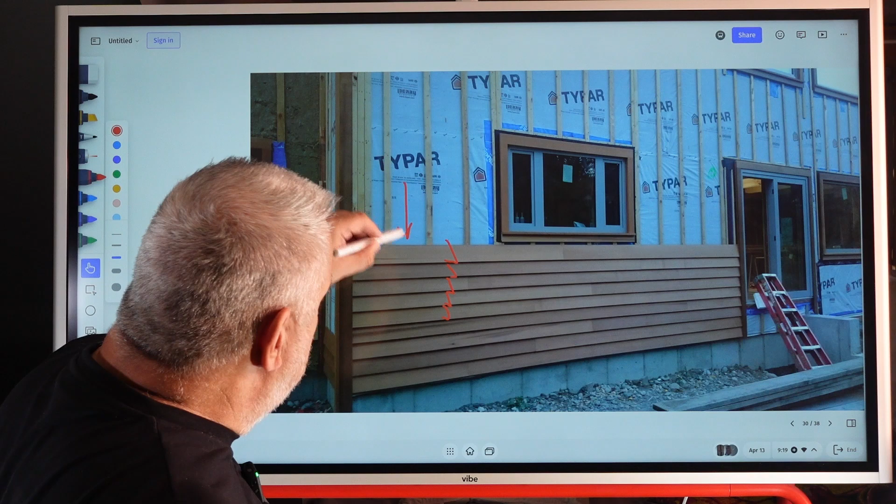There is a drainage space, there is a ventilation space, and that can drain out the bottom and it can ventilate up through there. But pretty much wherever I have the siding, this is a closed system, right? Meaning I don't get any lateral air movement across that system. It's all vertical and it's happening behind, which provides me with a very good amount of drying potential.

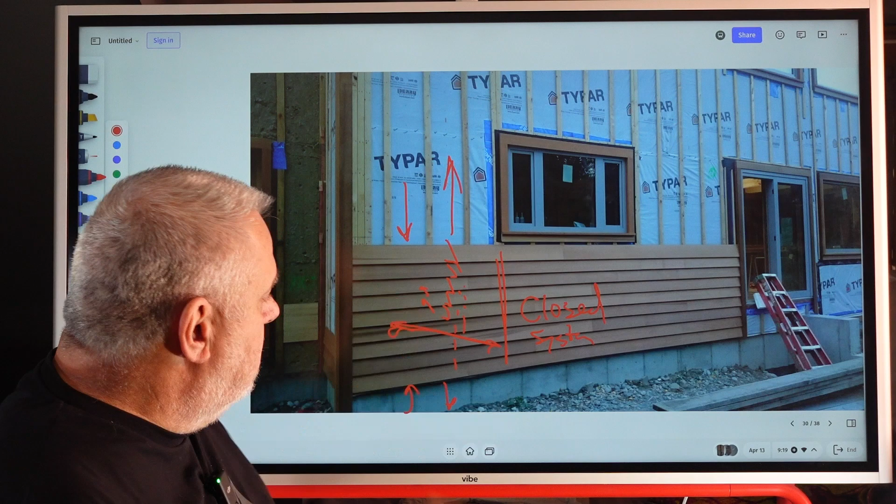It arguably lessens the wetting potential because everything is dripping here in a shingle fashion from the lap siding, right? They're properly lapped. But believe it or not, moisture and water does find its way up into those joints. Not a lot, but when the wind blows, pressure differences. Remember, what are the three things I need for a leak? I need water, I need a hole, and I need a pressure difference. And if I have those three things, then I have the potential for a leak.

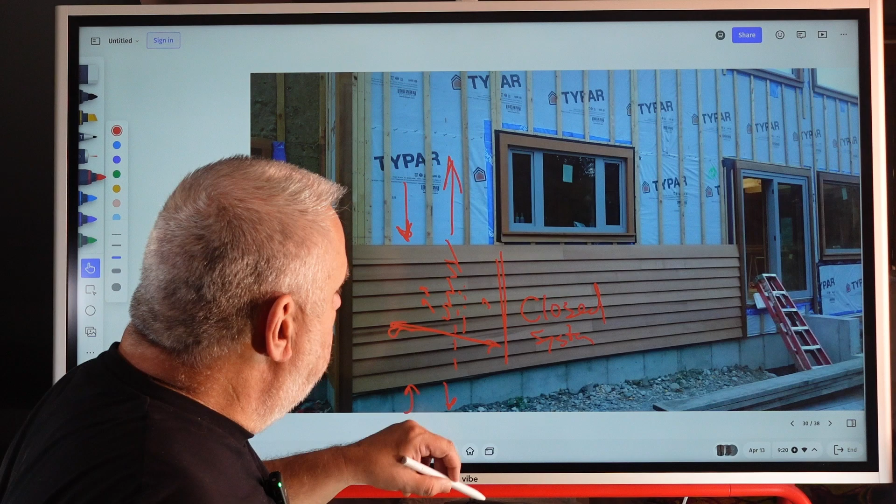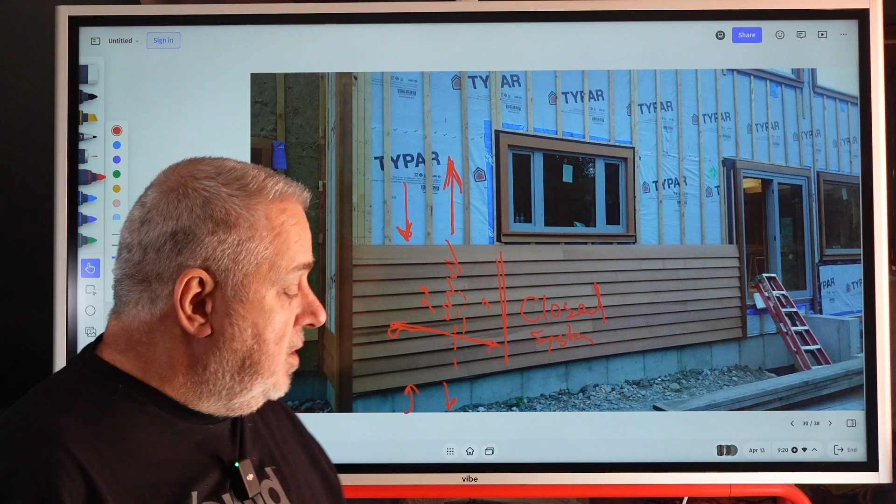So, by having that space behind, should I push water in, it has the ability to drain, and if it's a little bit of water, then maybe I am simply just drying out that system there, right? So that's a closed system. Let's take a look at an open system.

But the difference between the previous system and this one that we'll call an open system, right? The fact that it's open means that not only do I have draining behind and drying behind, I also have lateral drying, right? Basically, its system is wide open to let air in.

Now, I know what you're thinking. You're probably sitting there saying, well, Steve, aren't you letting a whole lot of water in? Yeah, I'm probably letting a little water in. You'd be surprised at how little water did get in there. But if it does, why do I care? I've maximized my drying potential on this wall system, right?

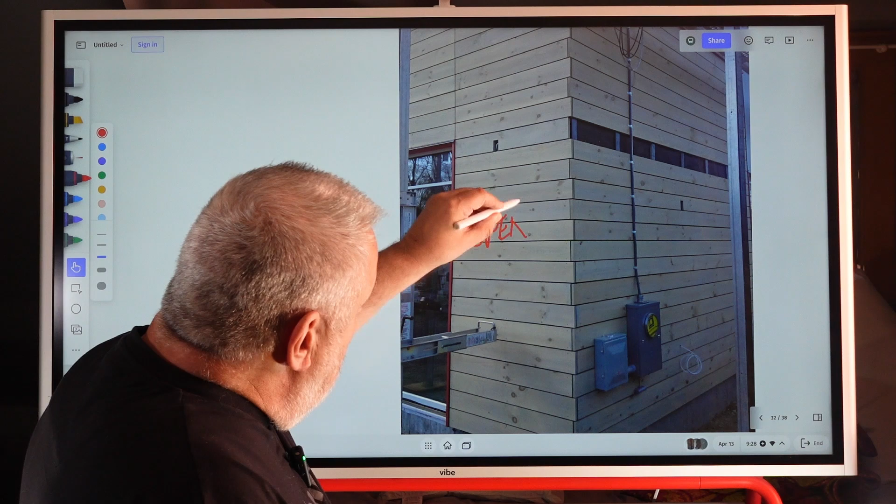All right, so let's take another look at another open system. So you can see there's our furring strips there and our black paper. We've talked about that before. Now, the difference between the last open joint and this one: the last open joint was Alaskan yellow cedar, a very expensive finish. This here are spruce boards. Now, this is a very affordable project, tight budget.

It was still a passive house, and it is in fact a certified passive house. But we wanted to use an inexpensive siding, and talking with the builder, we can get these spruce boards pretty darn cheap to use on the outside. Now, I know what you're thinking, spruce boards, these things are going to warp, they're going to twist, they're going to cup, they're going to move all over the place. Yeah, maybe in the right situation, they will.

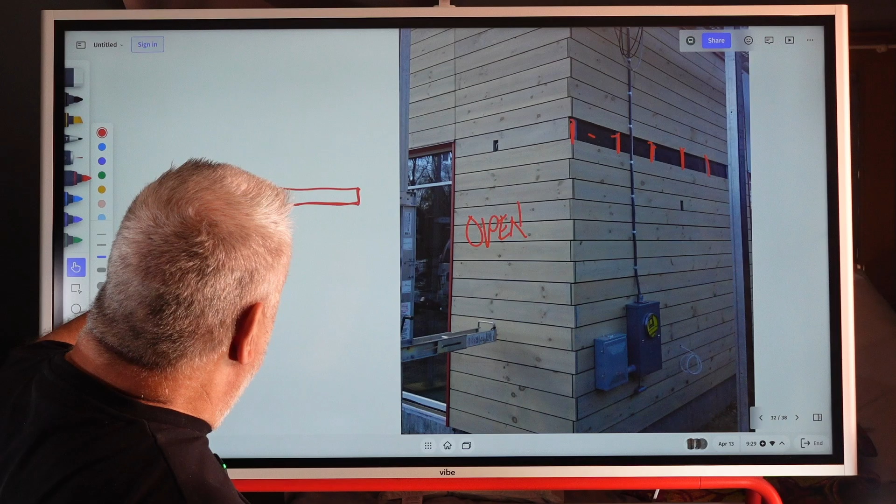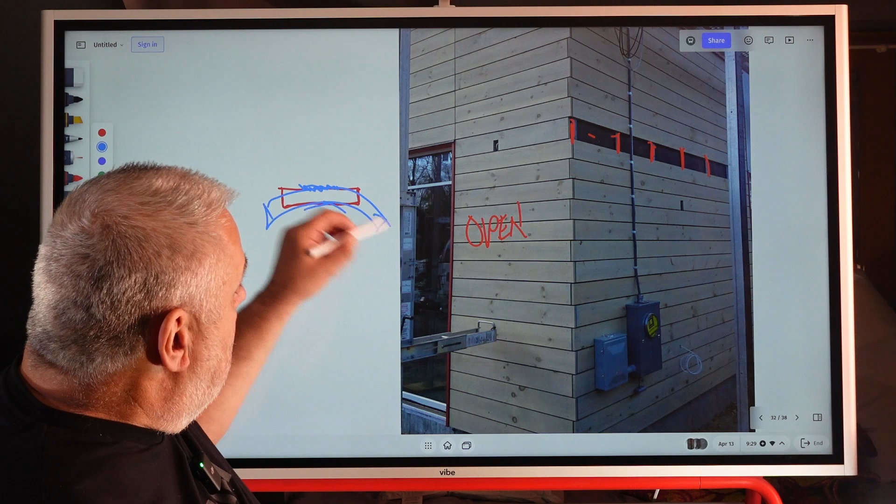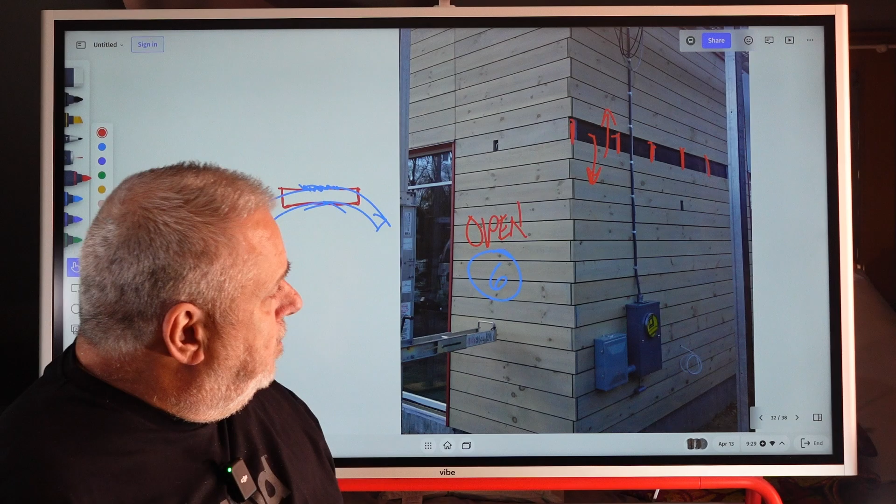Now remember, spruce board or any board, if I add water to the top, then that board is going to want to expand, right? It's going to shrink where it's dry and it's going to expand where it's wet. And the important thing there is to notice that if I can keep all 6 sides of the board relatively the same, then I create a real stable environment for that board, right? So putting it on furring strips and having that drying and draining space down below creates an environment for those boards to be in a very, very stable environment.

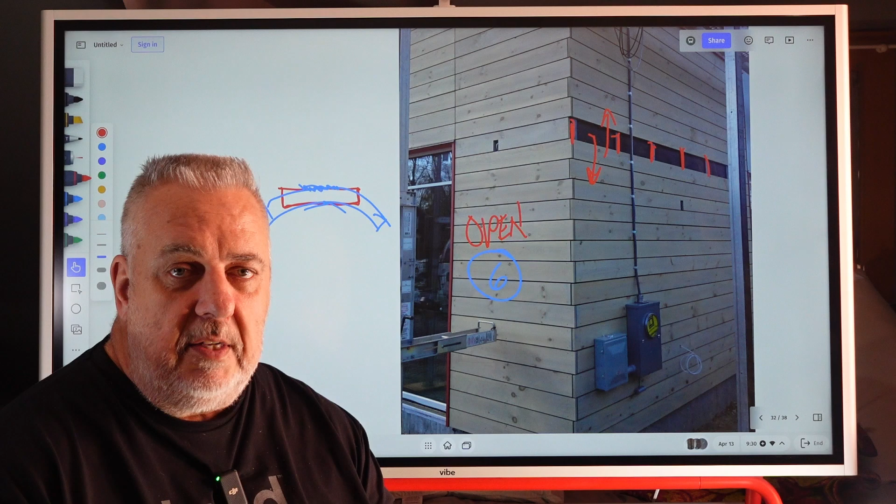So we put these boards up. Now, I will admit I was a little concerned, and the builder too, that the science worked. We use these spruce boards. We're going to put them on furring strips. They should be really stable. But we still wanted to have a plan, right? So notice there's a joint along the boards here.

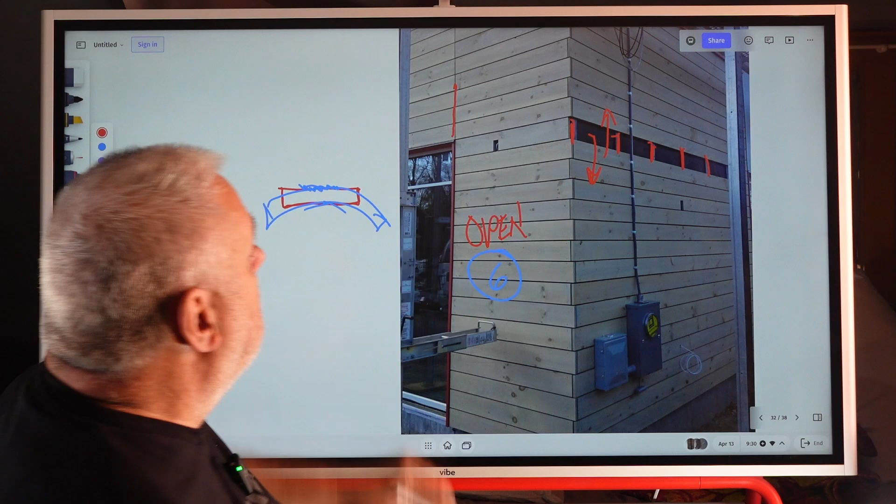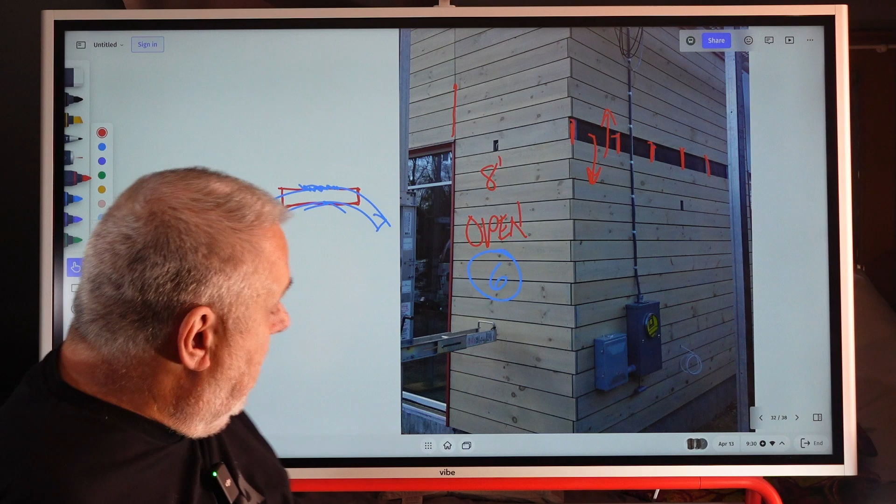So on this house, no place do we have boards that exceed 8 feet in length. We have a bunch of predetermined joints that aligned with some doors and windows and such, so that we could take any one board, you pick it, and we can pop it off of the wall and replace it without interrupting any other part of the system. All of these boards are nothing more than a surface mounted skin, and the skin is not continuous, it's in these individual board pieces.

So the truth is, the house has been up for, I don't know, probably about 8 or 9 years now. I've driven by it a number of times. I've taken photos. Not one board has been replaced. Not one board has moved in an irrational or erratic type fashion. So it's holding up extremely well. The house is doing very well, aging very well.

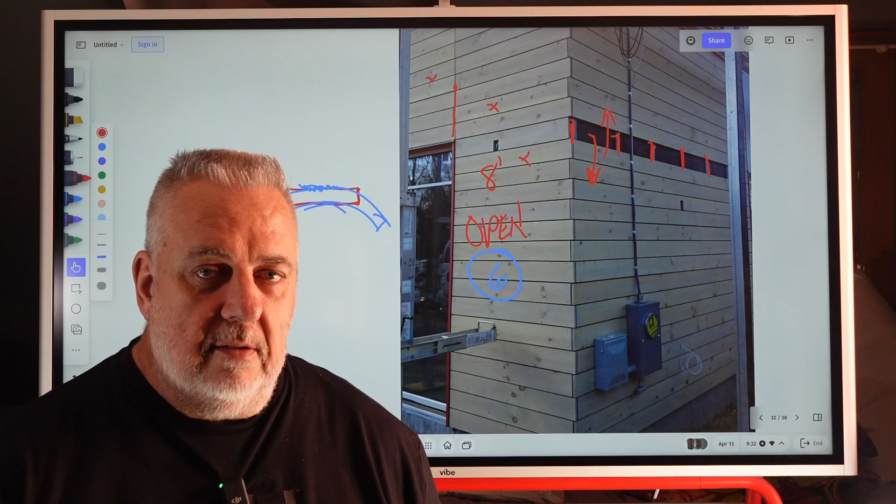The homeowners have since put a PV array on, and not only is it a certified passive house, but it is Zero Energy Plus because it's making them money and selling back the electricity. So I know the math doesn't work everywhere in the country, but here in New England, we have extremely high electrical rates. PV panels make sense. So anyways, hopefully you enjoyed that.